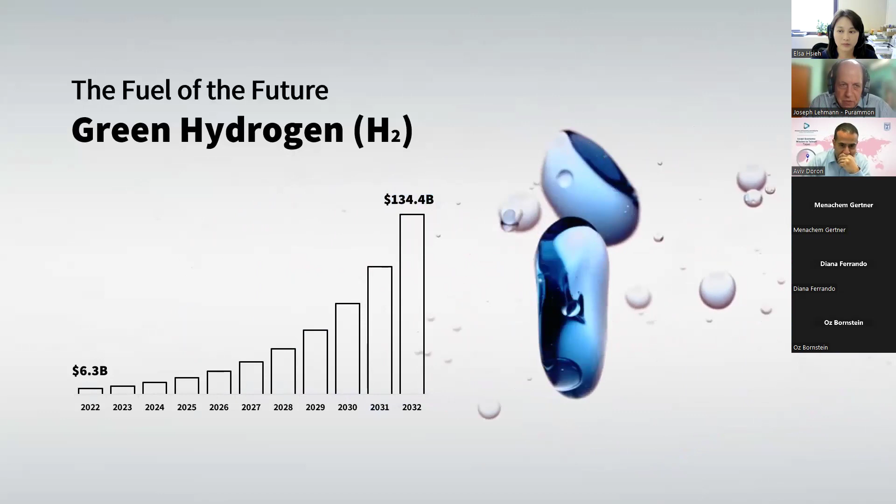It is well accepted today that for energy purposes, the world is moving to clean fuels, and green hydrogen is the main way to proceed to clean energy and reduce carbon emissions. The market for green hydrogen is, of course, forecast to grow tremendously, and governments are stepping in with subsidies, and on the other end with carbon taxes that would make it more economical for industries to stop using polluting fossil fuels and move to green hydrogen.

But still the main problem or obstacle for industries to move to hydrogen is the cost. Green hydrogen can cost maybe more than 5 times the cost of standard hydrogen that is produced normally from natural gas. So hydrogen in the market is less expensive, and green hydrogen that is produced by water electrolysis is more expensive. So what we are doing at Purammon is address industrial wastewater as a source for green hydrogen. The move from pure drinking water to wastewater makes a change also in the economy of the process and adds benefits to green hydrogen production.

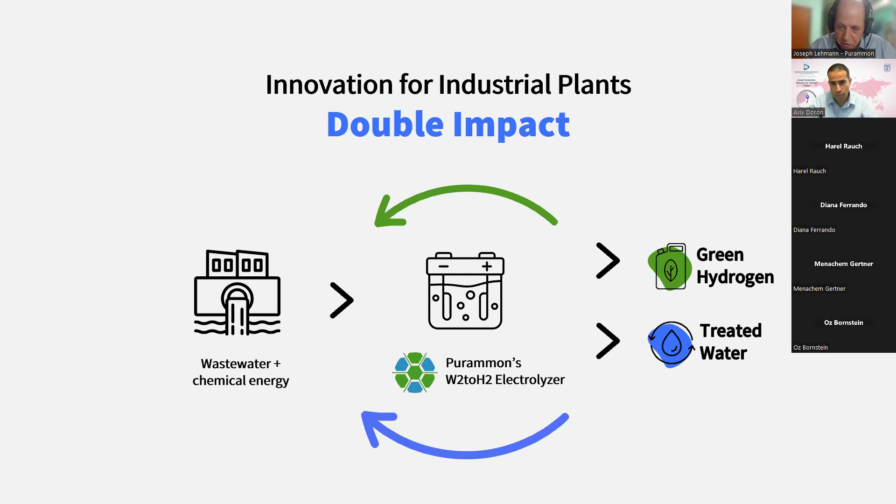The idea is that the hydrogen is used in the plant, and semiconductor plants are actually using hydrogen for their own use, so it is used locally. The water that can be recycled also saves cost and saves on water consumption. All of these benefits together make it really positive from the point of view of operational expenses.

So what is special in our technology? We have developed a special wastewater electrolyzer that is different from a water electrolyzer, and this is our innovation. We have a dual effect process, meaning there are two processes actually done simultaneously.

Our technology is unique. We are not familiar with anyone in the world that has developed a similar technology. We are now writing patents on this technology, and we can achieve a great cost reduction, in addition to other benefits like simplicity, as you will see.

Just a few words on Purammon. The company was established in 2016. We started with wastewater treatment and ammonia removal. In 2018, we had our first commercial system for ammonia removal that went to a fertilizer plant.

The electrolyzer in this system did not separate the hydrogen from the rest of the gases. Ammonia is a molecule constituted from hydrogen and nitrogen. When we break the ammonia, we get nitrogen and hydrogen, and we discharge them as a harmless gas mix to the atmosphere.

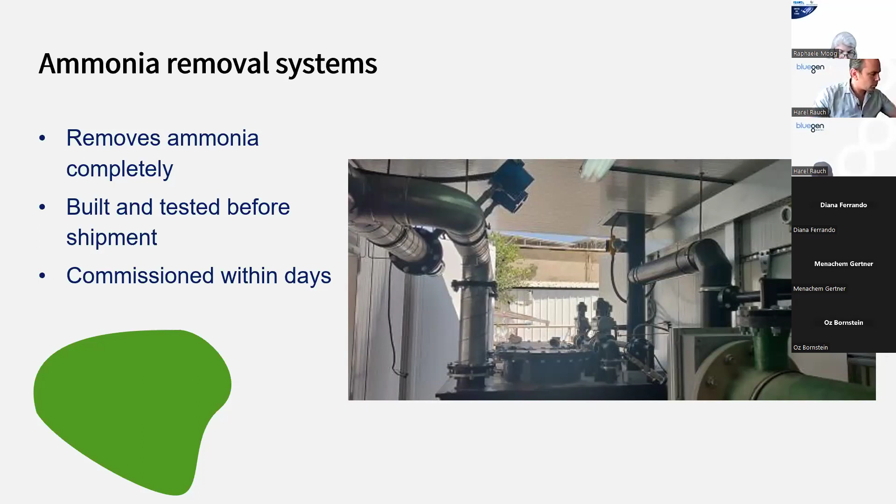So it's like a machine that is added to the production line, and it removes the ammonia completely, solving the problem of these pollutants in the wastewater.

In this demonstration of our new technology, wastewater comes from the left. There is an anodic chamber where if there is ammonia, it is oxidized, nitrogen comes out, and treated water is the result. When you break the ammonia, you get nitrogen and hydrogen ions, the protons. They go through a membrane to the cathodic chamber, where they are reduced to pure hydrogen in an electrolyte that is actually acidic. This is to reduce the power consumption.

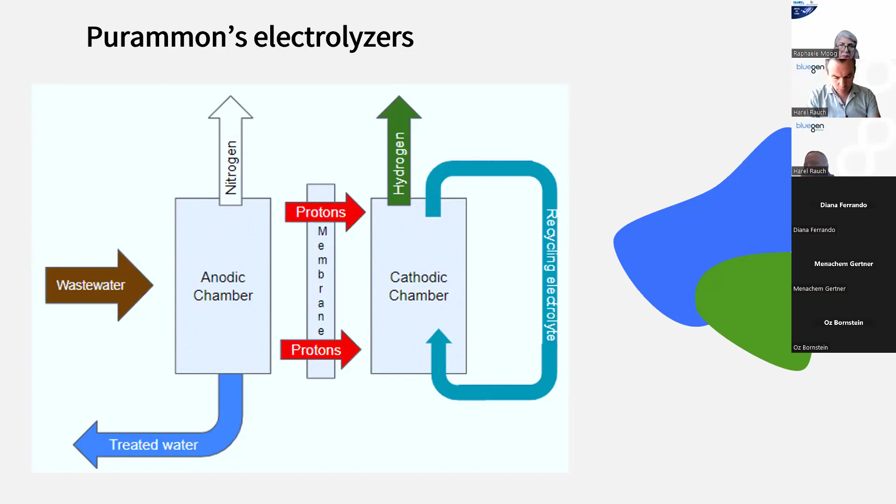Our positioning is at the intersection of water electrolysis, wastewater treatment, and waste to energy. This intersection enables us to bring great value to the industry.

The result is cost reduction, which I already covered, and simplicity. This is an automatic system, very convenient for industrial applications, because there is no biological process involved, compared to standard biological treatment, which is more complicated and involves organisms sensitive to the environment. With us, there is no sludge, everything is simple, and our process is much simpler than the process used today in the semiconductor industry.

We have tested our technology with Intel in Israel with very good results. Intel consumes hydrogen from water electrolysis on site, and they also have a process to remove ammonia from their wastewater. When we combine these processes, it fits very well the type of wastewater at Intel. I'm not sure about the wastewater in the industry in Taiwan, but if we start working together, we first evaluate and verify the suitability of the process for specific semiconductor plants, and then we can move forward and really verify an implementation that will improve sustainability, reduce emissions, and enable a partial move to clean energy. It's not that we will supply all the energy requirements of the plant, but it will still reduce power consumption and contribute to its environmental impact.

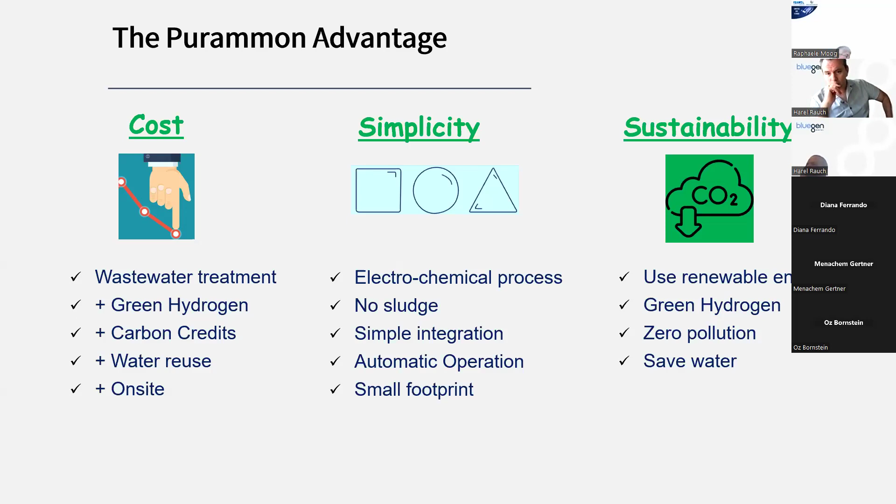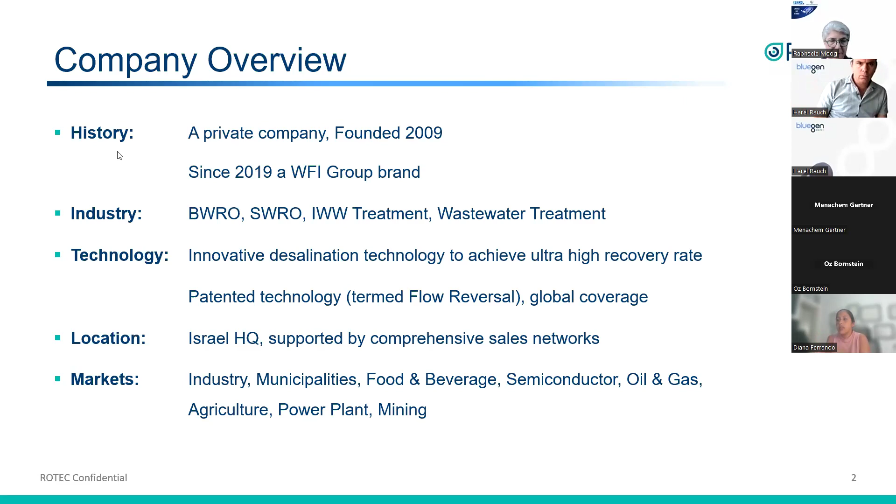We are located in Israel, but we are supported by several local companies around the world. We work with different markets, industry, municipalities, food and beverage, semiconductors, oil and gas, and others. We are spread around the world.

Coca-Cola, it's a bottling company, Pepsi. Currently, today we have one big project in the city of Santa Monica. We are improving their existing system to be able to recuperate or get much more water from their systems.

But what is our technology and why is it important in semiconductors? We know the importance of water in this process. We know that along the whole process of the production, we need not only a lot of water, but we need really high quality of water.

So our technology allows to use or to have a much more efficient system that will allow you to recuperate much more water, and with all the benefits that our technology has, it will reduce other costs along the processes.

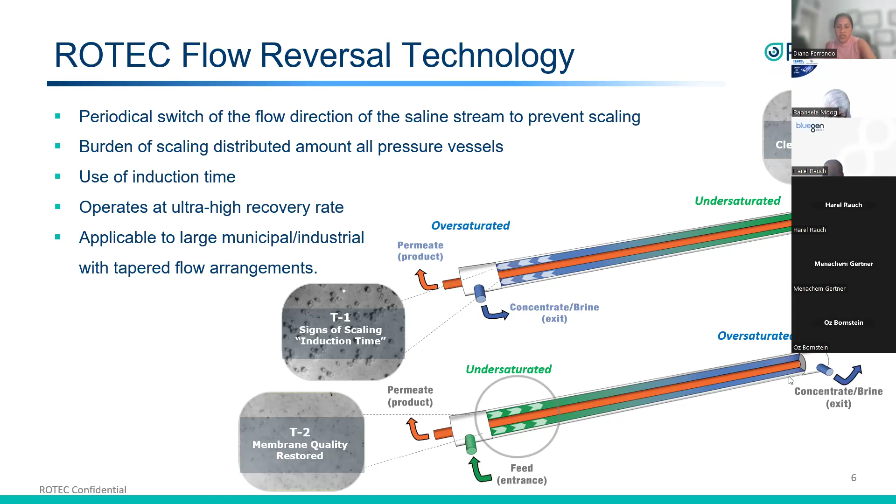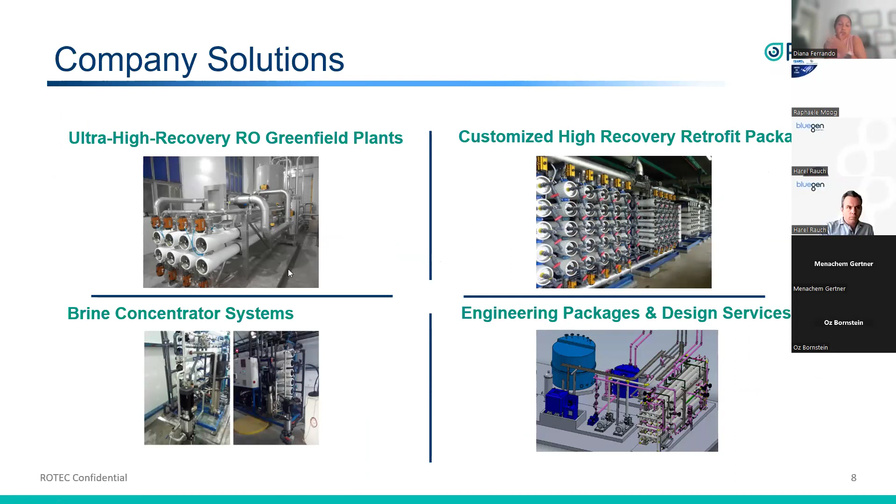As a company, we have 4 different solutions. We have plants that are being built according to the needs of the client and installed on-site. We have retrofit, we have brine concentrators, and we have engineering packages.

So for the ultra high recovery rate systems, we have systems that are designed, built, and installed, taking into consideration the specific requirements for each of the companies. We have a different array of systems, as small as our pilot of about 15 cubic meters per hour, and much bigger systems that I will be able to show you a bit later.

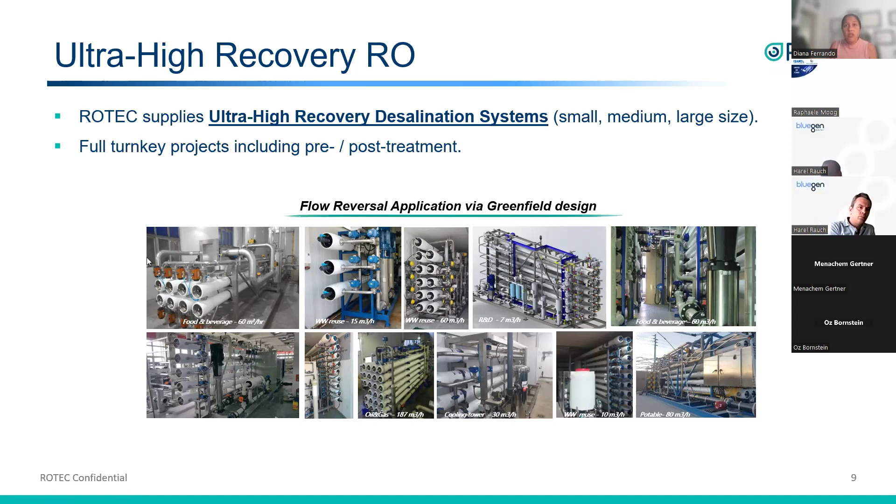These systems could include pretreatment if needed by the client, and also post-treatment. We have the retrofit packages, for clients that already have their existing RO systems, we analyze the state of their systems, and we do modifications on the existing plants to increase the recovery rate.

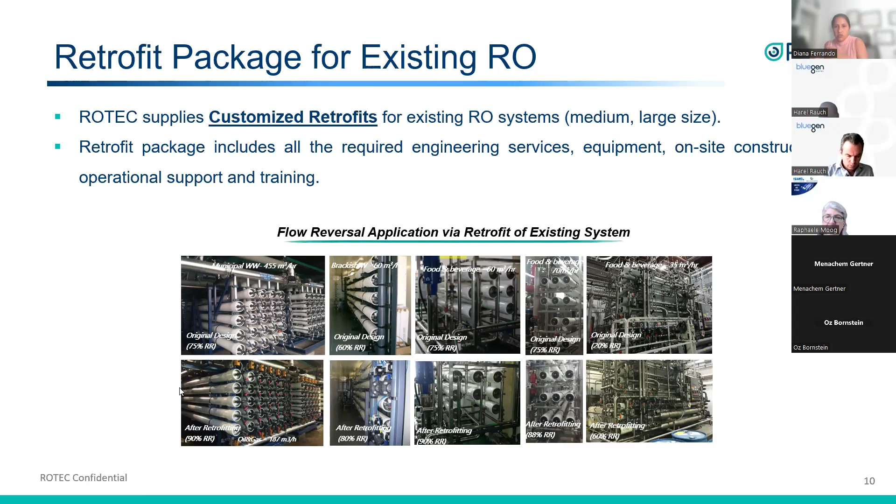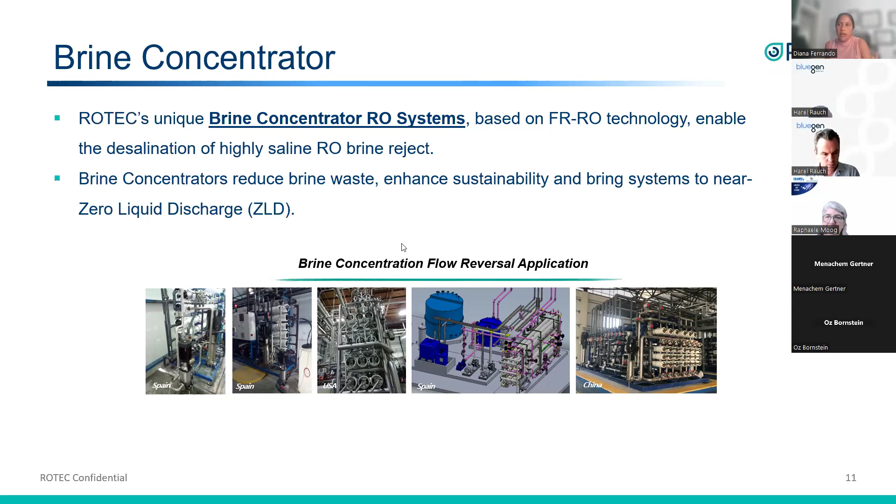Another of our patent technologies is the brine concentrator. With this, we basically squeeze more water from existing systems. Sometimes plants already have ROs, but the recovery rate isn't so high. So we take this brine from the existing plant and squeeze out a bit more water to reduce the amount discharged to the environment or to the pipe. With this, we get closer to zero liquid discharge.

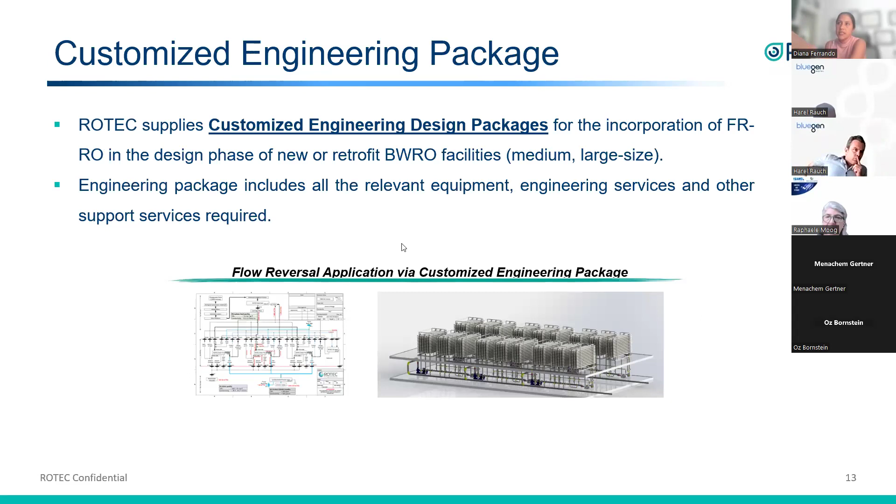So, some of our project references. Sorry, this was one of our other solutions, which is engineering packages. And the slide somehow moved.

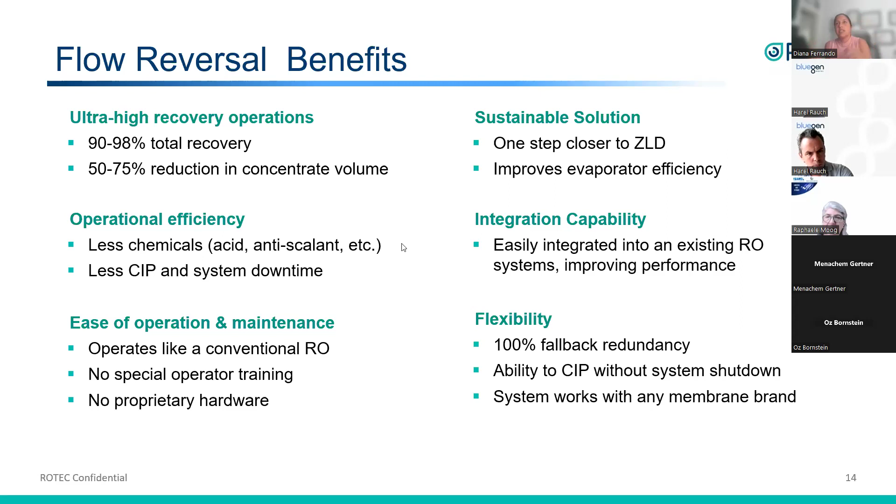Now I'd like to show you some of our references. We worked with Intel in Malaysia with a system of 336 cubic meters per day. We're achieving stable operation at about 96.5% recovery rate. This system was commissioned in 2021 and is working perfectly. We also have a pilot system at Intel in Israel that is giving really great results, and we're currently working with them.

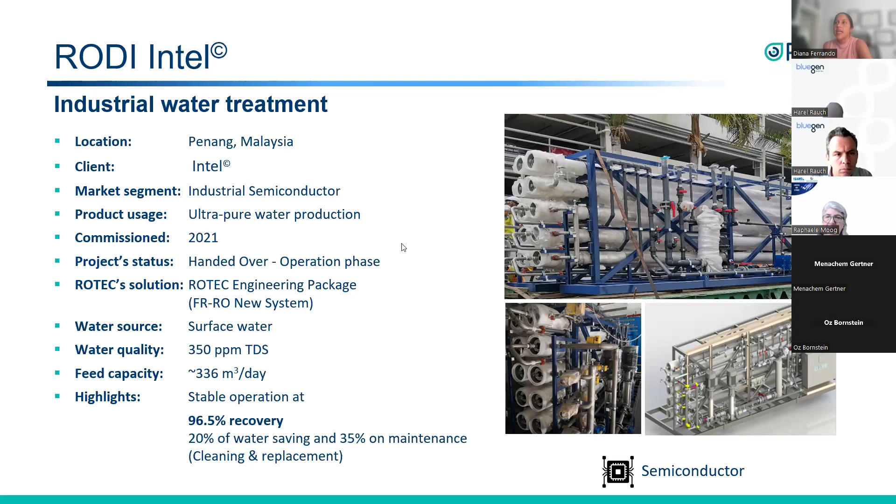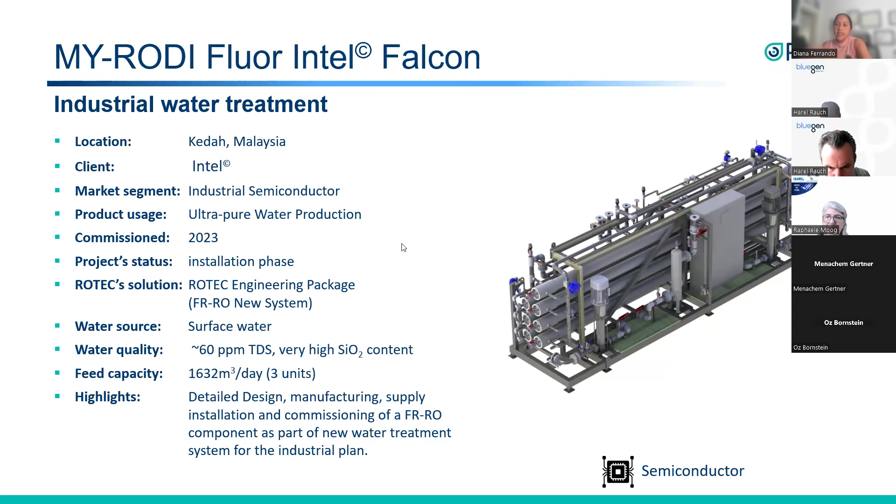We have Intel Falcon in Malaysia, with 3 units totalling 1,632 cubic meters per day. We're currently in the installation phase, and the water source is surface water. Again, we're implementing our flow reversal technology.

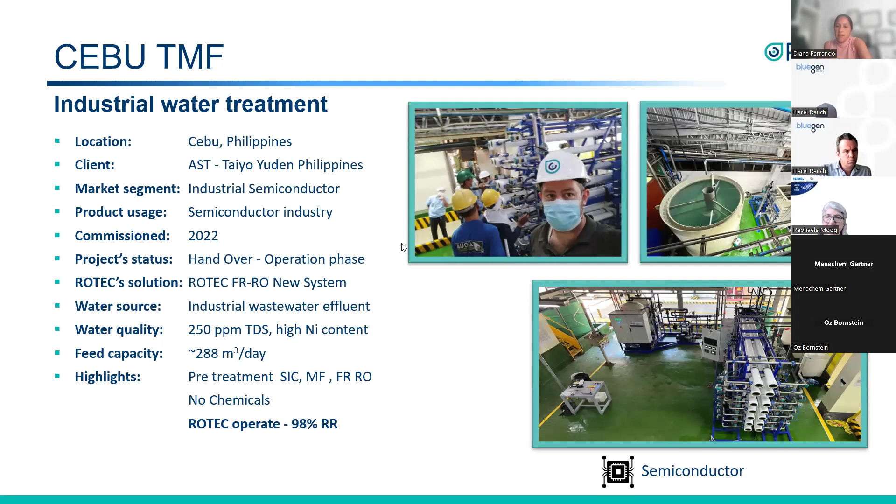We have a lot of projects. If you're interested in knowing more about us, I can show you our vast list of references. You can see that we work with different types and different sizes of companies. Thanks very much for your time.

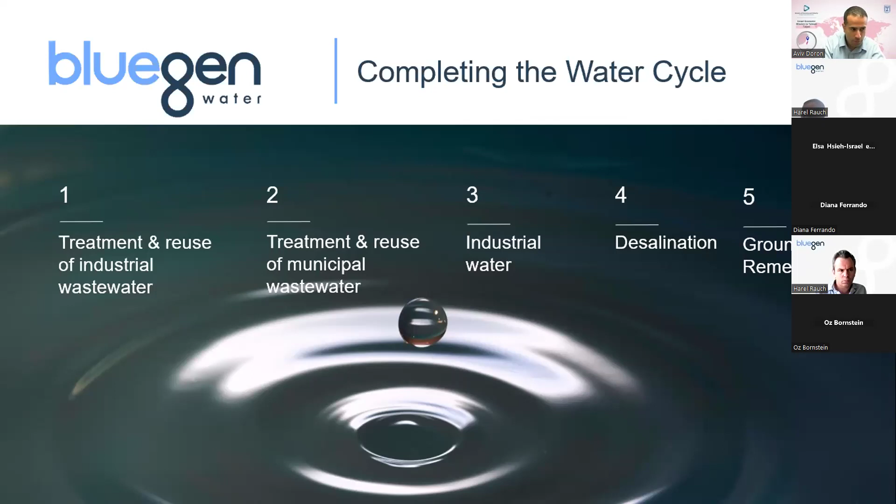So this is just a few of the technologies that we have. Some of them are proprietary technologies, and some of them are processes that we develop with another technology provider. You can see we have a lot of solutions for wastewater treatment and reuse. All the MBBR and other technologies are based on Aqwise's processes, which developed its own MBBR technology.

MBBR, it's moving bed biofilm reactors, which enable us, on one end, to reduce significantly the size of wastewater treatment plants, or increase the capacity of a treatment plant, by using carriers for the biomass, which enable us to increase significantly the efficiency of the wastewater treatment plant. For example, in some cases you can double the capacity of a treatment plant without any additional civil works or increase in reactors.

We have our own DAX. It's our technology for anaerobic wastewater treatment, which is being developed by our Dutch daughter company, implemented in a few dozen sites around the globe. It's also in some cases relevant as an anaerobic solution for fabs or microprocessor plants. It depends, but in order to do that we need at least 2 tons of COD per day, and this is something we need to evaluate.

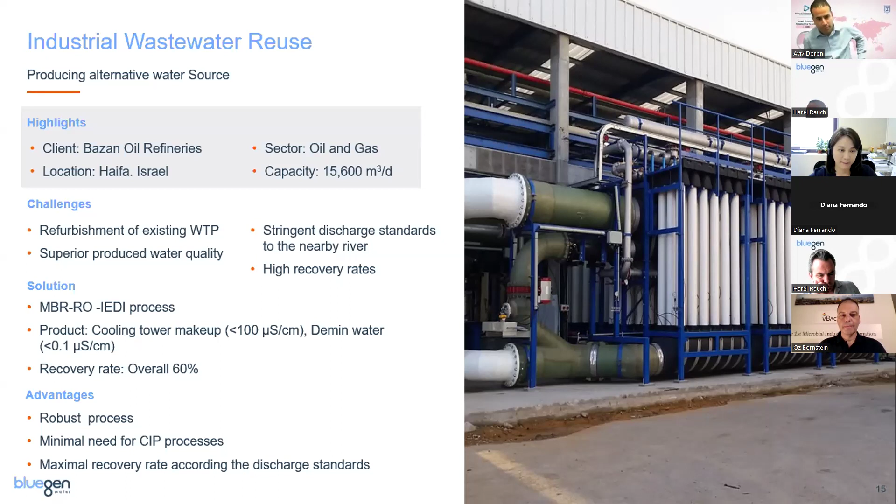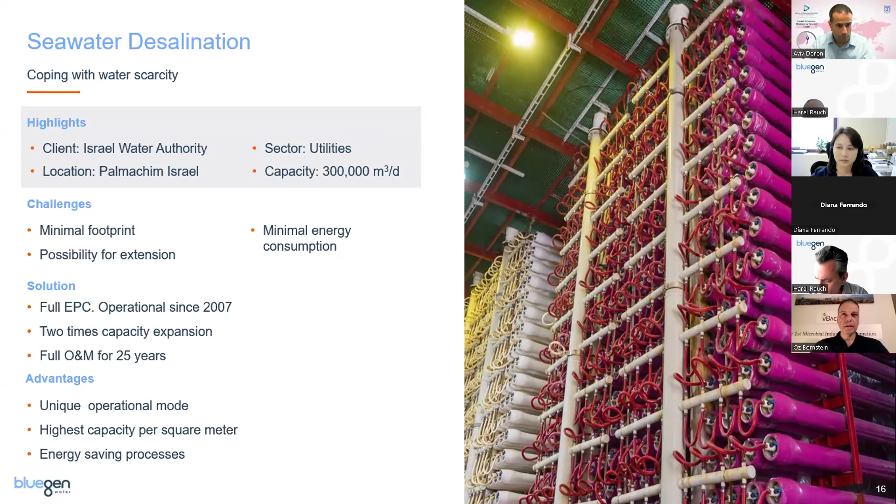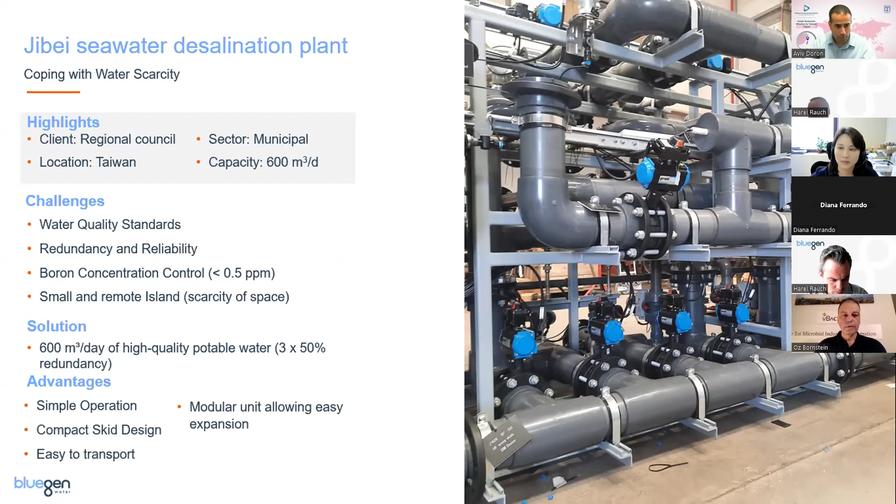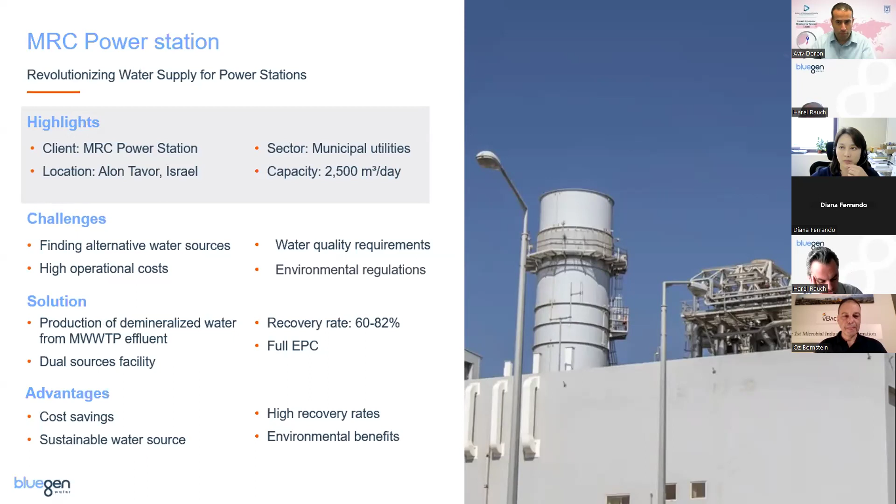And the last project, now under commissioning, is one in which we are taking municipal effluent and producing water for the power station. Again, very high quality water, with the water for steam production and for the turbines being defined by the turbine producers. As you can see, there's a lot of energy, a very high recovery rate, and a lot of savings for the client due to the fact that we're using wastewater and a sustainable, renewable water source, which enables them to meet their ESG targets. And I think that's all for now.

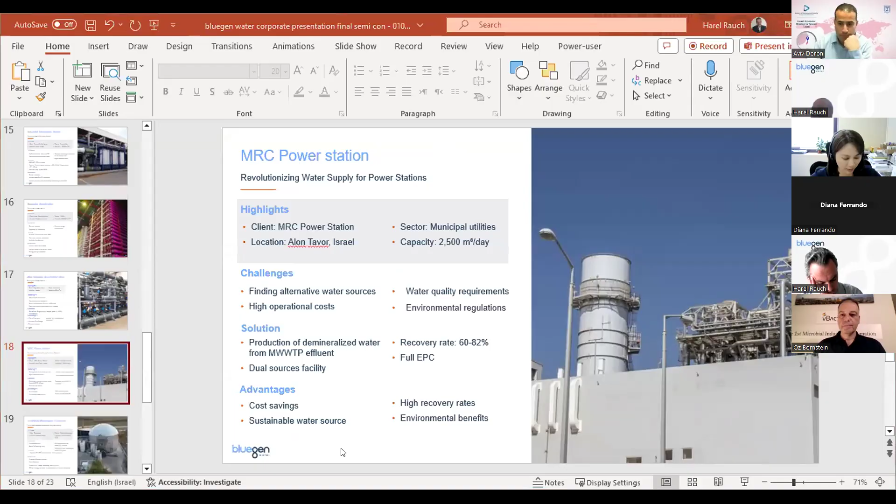Oz, are you ready now? It's actually your time. Yes, I know, I was a bit surprised. Okay, so you see the screen, just to check?

Yes. Okay, so good afternoon. My name is Oz Bornstein, and I'm the CEO and one of the co-founders of vBact. Today I will present vBact, mainly our bacterial water scanner product lines.

I will focus on our most impactful system, called the inline water scanner. This product is designed for various water quality and treatment monitoring applications, doing live 24/7, fully automated, multi-parametric analysis of mainly bacterial and microparticle measurements. This is done with our powerful direct imaging technology coupled with advanced AI algorithms and image processing algorithms, all developed by vBact.

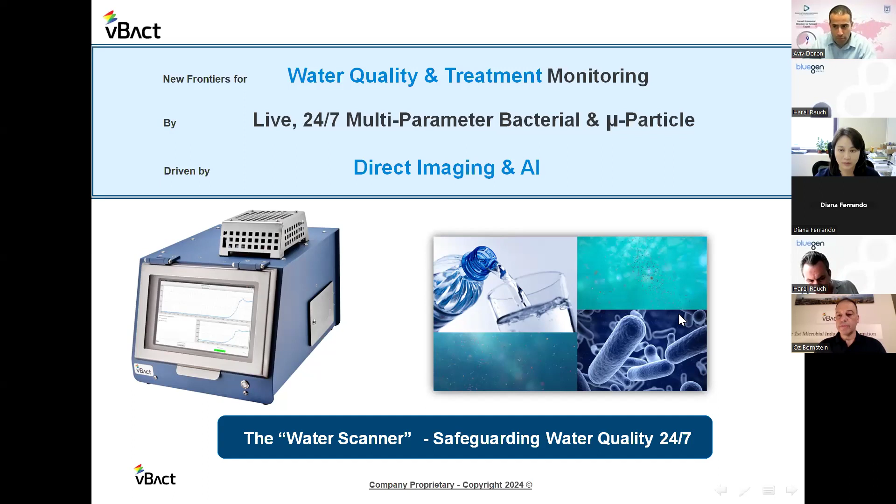As a company, we develop, produce, and sell a system to monitor critical water and other liquids, mainly quality parameters. Our company mission is to provide leading microbial industrial automation monitoring solutions for various liquids, but mainly water, as the solutions in the world right now are mostly manual. We highly believe in this direction and approach of bringing entire automation to this field.

We mainly serve food and beverage producers and public water suppliers, and we have commercial installations among first-tier global companies.

The problem, I would assume you know that, and I'll run over it quickly: the traditional method, mainly the Petri dish, mostly uses manual processes of sampling, transportation, and even laboratory processes. The most problematic issue is that it takes days to get a result for a single reading. They are insensitive because the majority of bacteria do not grow on the Petri dish. And overall, they're quite costly if you take all the overhead around it.

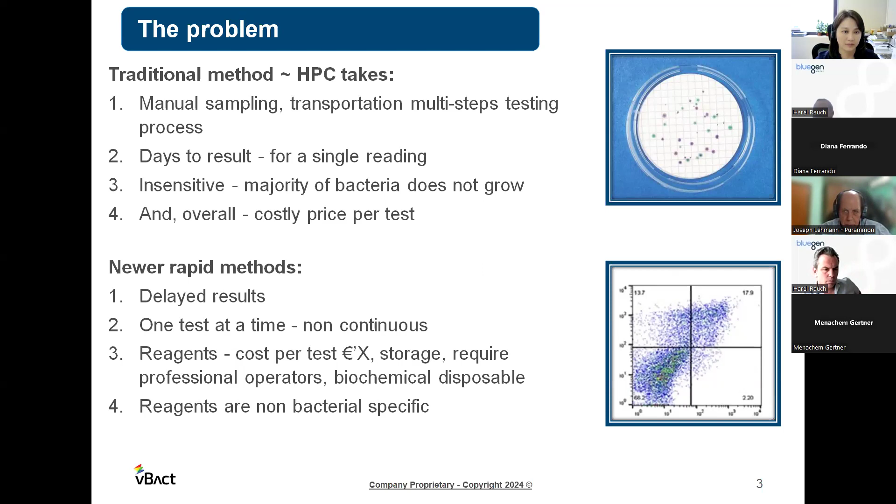Over the last 10, 15 years, there are new, more rapid methods available, but if I generalize the concept, they are still mostly delayed in results, half an hour to hours. It's still one test at a time, non-continuous. The majority of them are based on reagents, which means you pay a cost per test, and you have issues of storage and shelf life. In most of them, you need professional operators, and you have biochemical disposable items which cost more money. Notably, all the stains or dyes are non-bacterial specific.

What we do is take a different approach. We replace biochemistry with novel imaging and computerized algorithms. So we have developed three main building blocks in our system. The first is a direct imaging unit.

Think of an automated microscope, but unlike a standard microscope, we have two new features. The first is the ability to detect objects as small as 0.3 micron in a flow of water - a standard microscope cannot do that. The second feature is that we create various features - morphological, optical, spectral, and other features among each object or each cell, since bacteria is a cell. And we image the water very, very quickly.

So we get continuous capabilities and results with the ability to provide results in real time. The second element is an AI-based image processing engine that uses very powerful nonlinear algorithms that can capture the variety in the microbiology and particle worlds, providing very accurate, clear, and sensitive results. The third element is liquid management that enables continuous flow - and continuous flow sounds simple, but we are the only system that can provide continuous operation for bacterial analysis.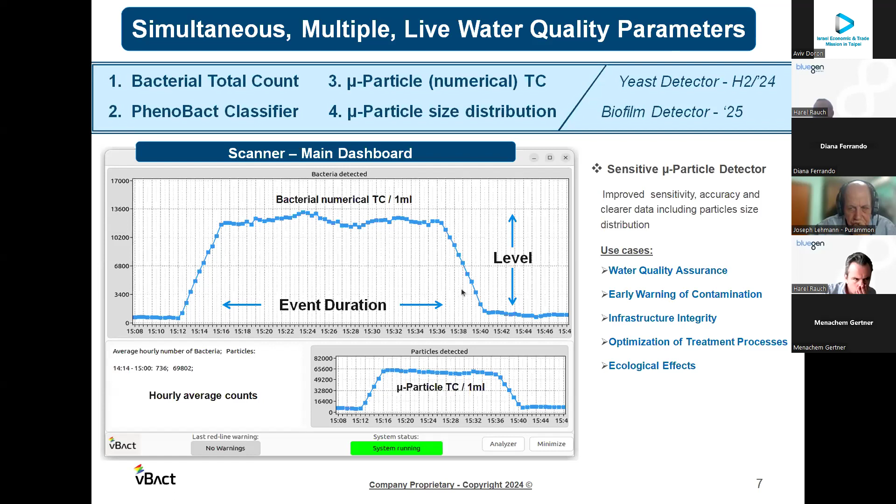So the PhenoBact classifier is the first real-time bacterial population classifier. It identifies shifts in the bacterial population composition and provides an additional tool for early warning of potential contamination. It is based on our unique imaging properties, and the idea behind this classifier is that if you have a stable water source, all the parameters in this classifier will be stable as well.

But once you have entrance or shift in the bacterial population, or some new water with new bacterial population coming into the water, it will immediately detect this shift and provide you highlights of what's happening in the water.

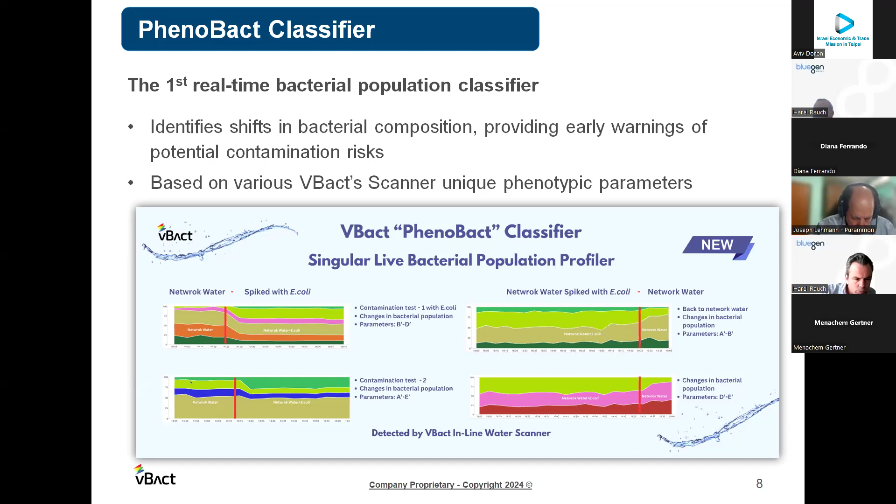We provide a singular value proposition, like minimizing product recalls or boil alerts for public water suppliers by reacting immediately to contamination or out-of-spec events. It is an enabler tool for water quality improvement, for example, by fixing vulnerabilities or quickly restoring supply, or overall enhancing water management. And it has a very clear ROI.

If you minimize product losses or improve operations over time, even a single contamination event in many cases provides or equals the entire ROI.

You can validate and optimize water treatment processes by identifying failures or making them better, testing before or after. And we have various cost savings, like saving on manual sampling, transportation, laboratory analysis, reagent usage, shortening the reaction time, and even validating new pipe cleanliness, for example.

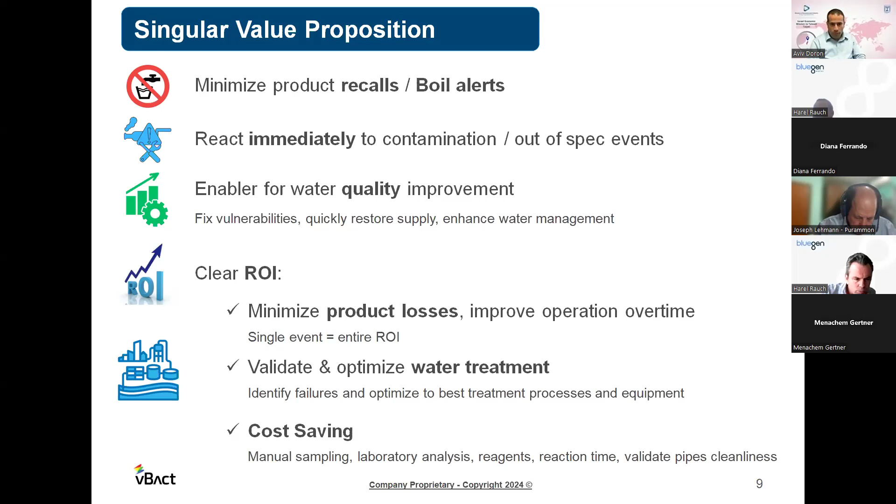Some of our main use cases - I don't have time to cover all of them, but the bread and butter is really to detect sudden contamination 24/7 and know exactly its duration and level. You can improve water management by combining new data with your already available sensors for much enhanced and broader analytics. We found vulnerabilities like air pockets or internal fouling.

It's a great tool to validate bacterial and microparticle reduction levels along the water treatment processes, upstream or downstream. You can detect filtration efficiency and failure by testing before or after. For example, if you have 5-micron filtration and suddenly see an increase in bacterial or particle levels above 5 micron, you know you have a breach in your filtration and need to replace it.

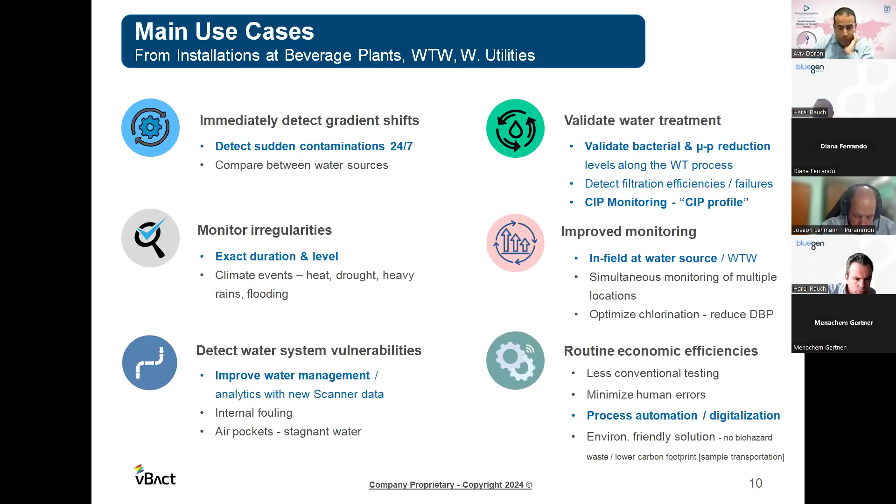It can be placed in the field under basic shelter or in an unmanned site, and we have various routine economic efficiencies which you can see at the bottom. Basically it's a flexible system - you can install it almost everywhere, starting from the raw water, the source water, up to the final product, along the water treatment processes, whichever the plant is.

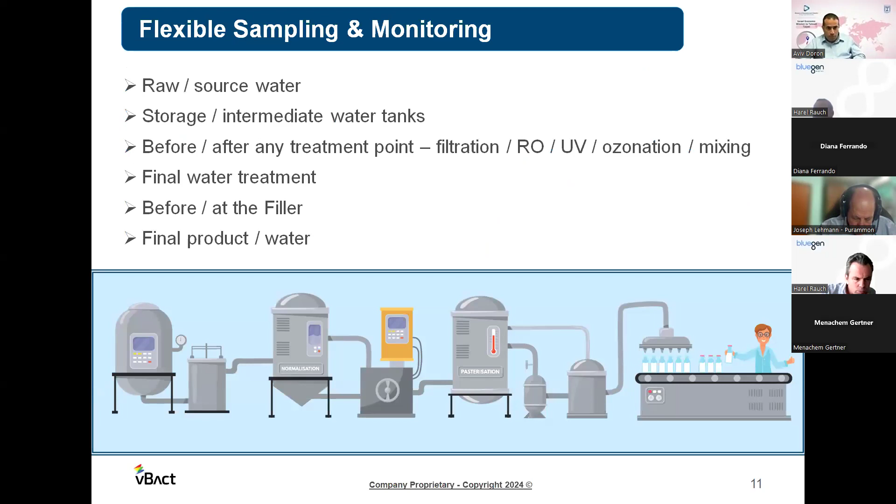This is a snapshot of our CIP scanner model, specifically for monitoring CIP processes. We have 3 examples here: the upper one is an efficient CIP process, the middle one is less efficient, and the bottom one is a non-efficient process. You can see there's no reduction in the level of bacteria and microparticles at the end of the CIP. This system monitors in real time, all the time, the CIP, and specifically the last water rinse of the CIP.

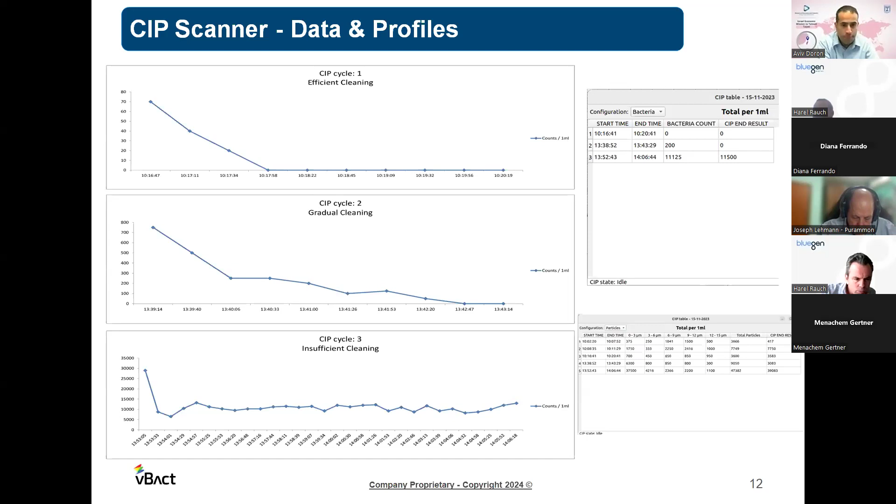One minute left. Okay, so I'll run over this.

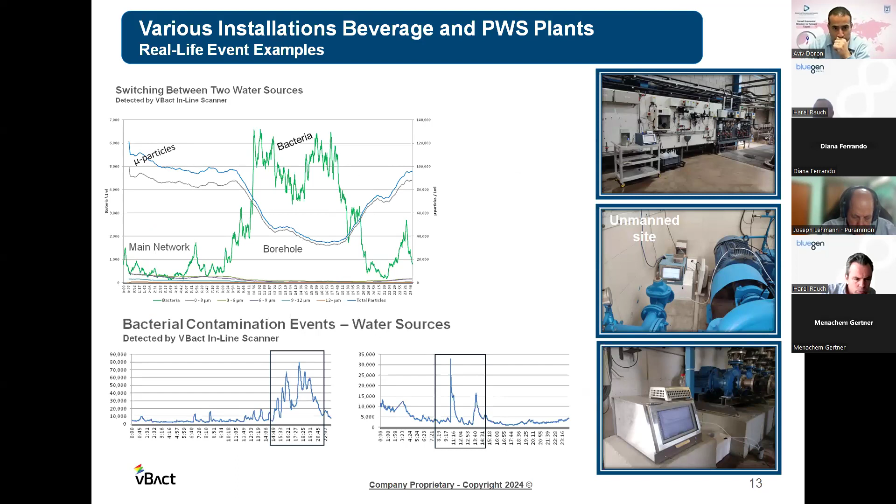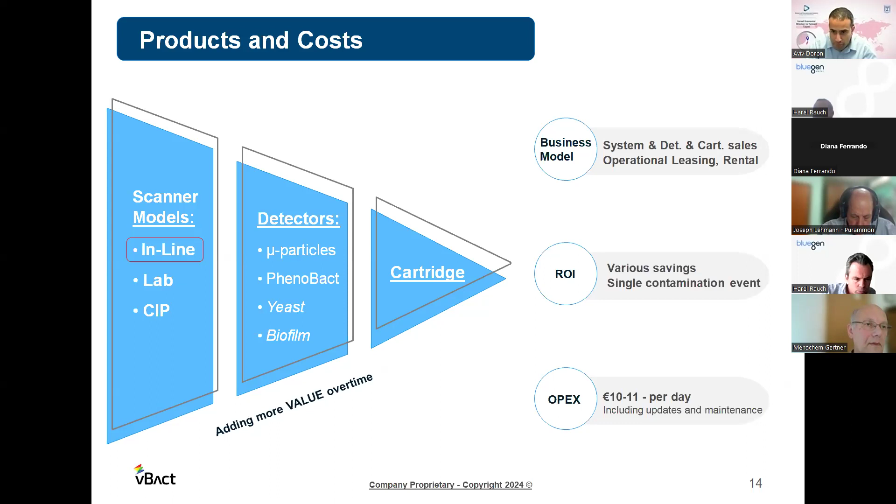We have probably one of the lowest, if not the lowest, operational expenditure in the industry - 10 euros per day, and think of it, 2,000 readings per day. So I think that's it, I'll be glad to take your questions later.

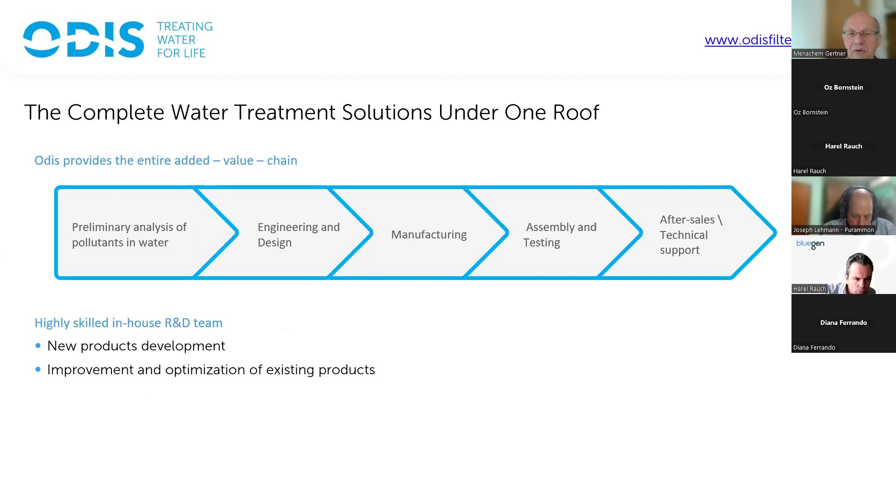We are very proud of the fact that we also have manufacturing as part of our offering, since it helps us control the quality of our products and secure its high quality. We can quickly respond to the needs or new requests from our customers, and also integrate R&D considerations into the manufacturing.

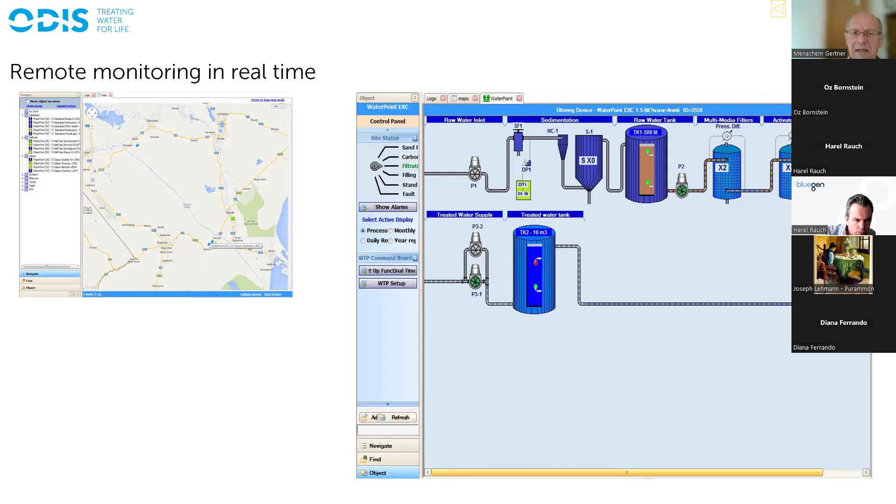Another feature we provide to our customers, which we know is very important to the semiconductor industry, is high availability, and we secure it through the use of remote monitoring. In this case, we can monitor in real time, 24/7, the operation of any water treatment system we provide all over the world, and help cope with any problem that might arise, no matter its source. We can assign an engineer at our plant to help deal with the issue in question.

What it does is we can provide a full suite of technologies and solutions for pre-treatment for semiconductors in the industry.

We offer a full suite of solutions for sedimentation and settling, including the Deca clarifier system, which is a patent of Odis. It is a very efficient clarifier system, and it requires a very small footprint, while securing very high sedimentation velocity.

We also include in our solution suite cyclonic separation and filtration. We can offer both screen filters and multimedia filters with various types of media. Since we designed the whole system, we can also monitor how it is built and used, including designing the system to use a minimal amount of chemicals.

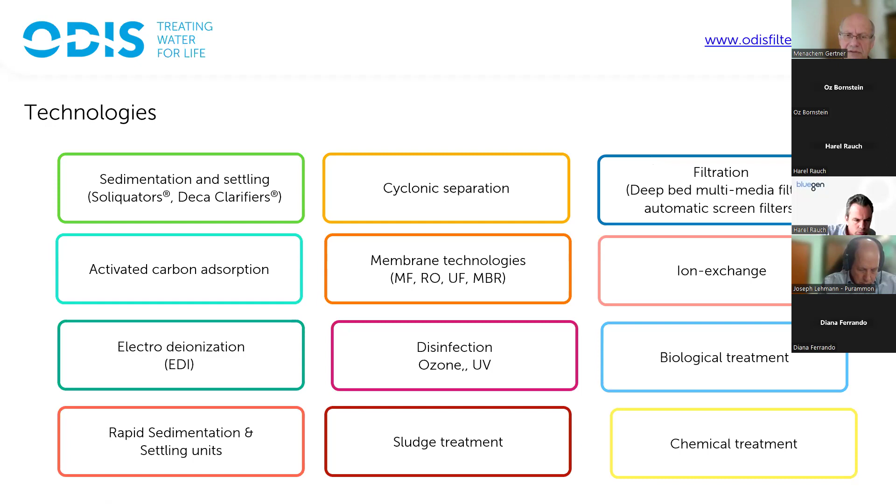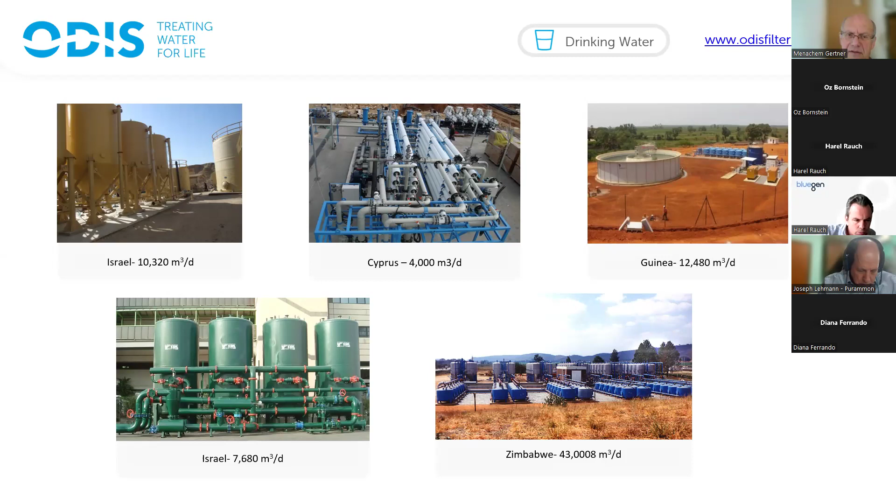All these filters can be made of various substances or materials to fit the high requirements of the semiconductors industry. Here are some of the solutions that we have so far provided, which include membrane technology, filtration technology, and wastewater treatment.

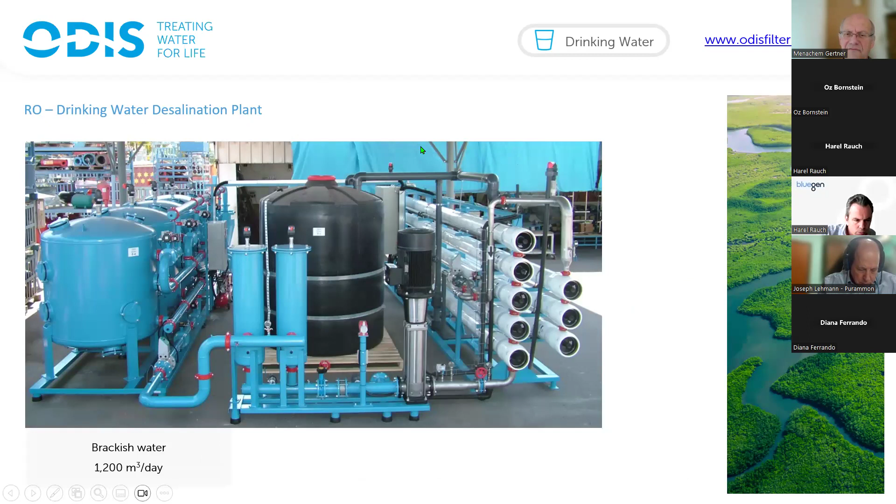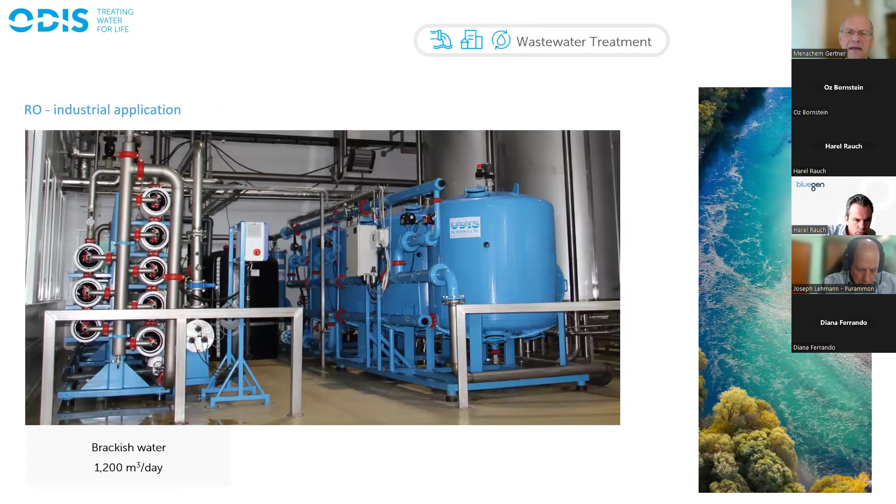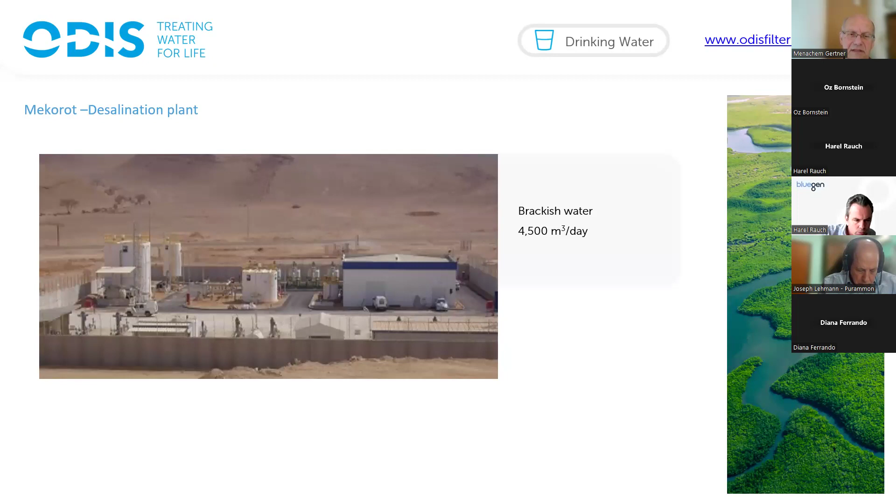Both of these are solutions for brackish water, which is usually the grid water used for the industry, combining several technologies like filtration and reverse osmosis. Some other systems are for industrial use, and also for drinking water, where we deliver water to Israel's national water company.

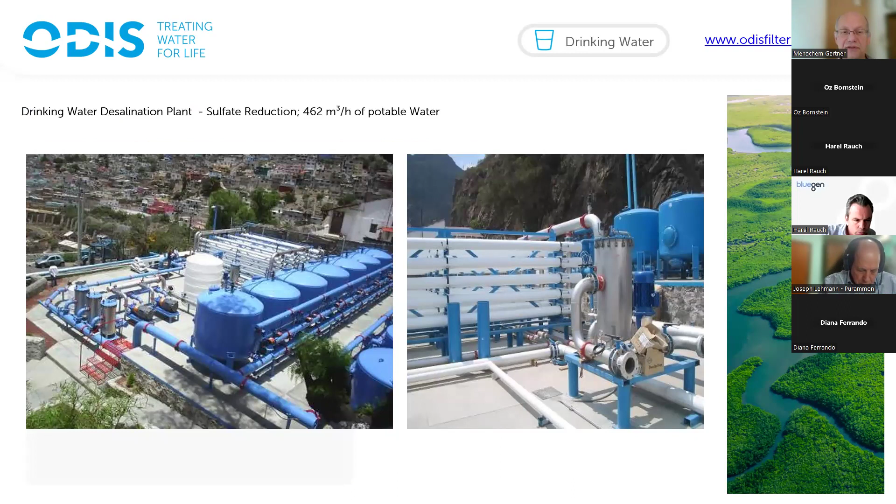We also use membrane technology to remove other chemicals, in this case sulfates from the water. This is another project where we combine both UF and reverse osmosis to offer high quality water. You can see how we can combine all these in this specific project.

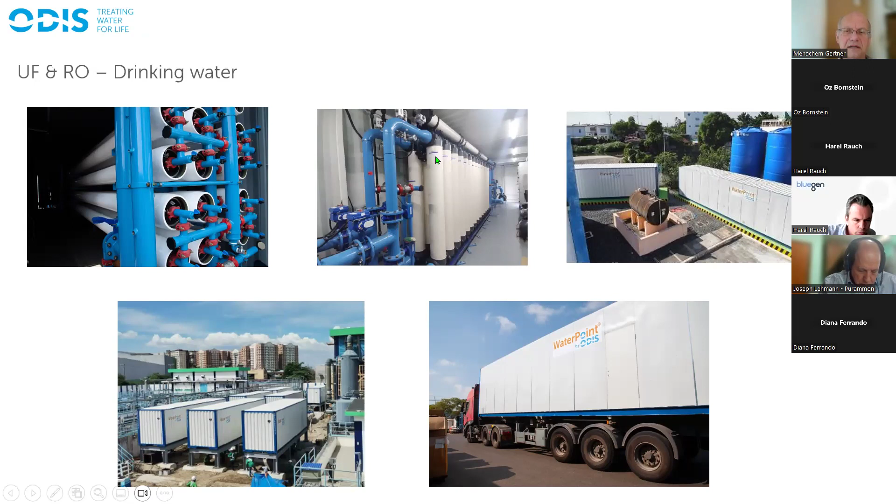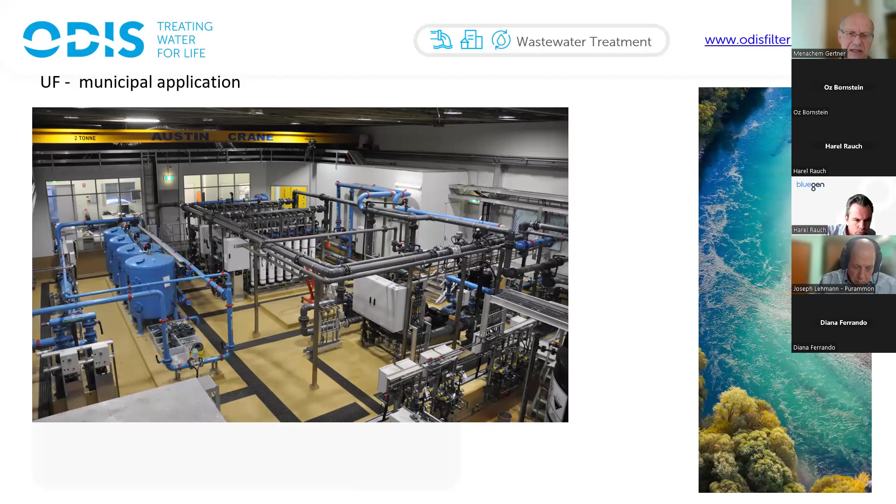Filtration was also involved in order to secure the quality of the water, which was a high requirement. This used both filtration and ultrafiltration in the same system in order to reach high quality water. And this concludes our presentation.